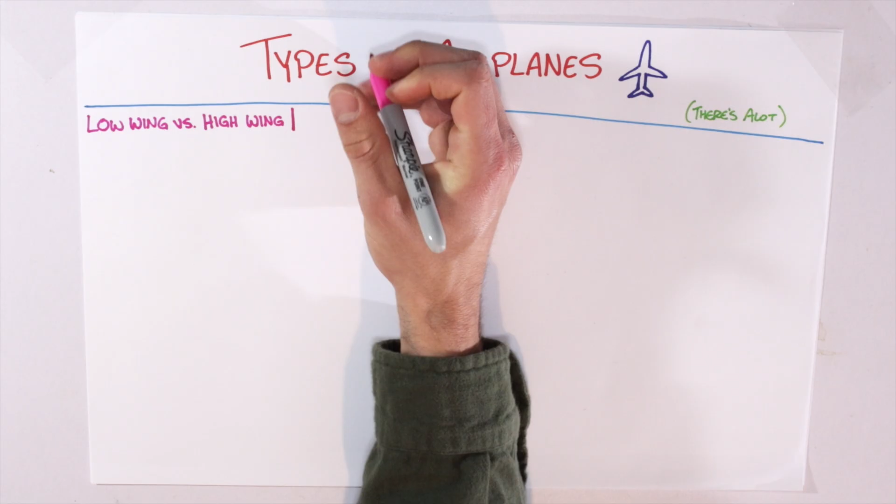These are going to be low-wing planes versus high-wing planes, as well as two different types of landing gear configurations. We'll also discuss a couple of outliers like seaplanes and aircraft with tandem gear. Alright, let's talk about high wing versus low wing.

You show up for your first day of flight school, your trainer walks you outside to the ramp to see the plane you'll be piloting, and you see it sitting there, a nice, shiny Tecnam Sierra, basically a Porsche with wings. Well, just as you get your hopes up, your instructor says not a chance and directs you to the left where you find what you'll actually be flying, which is most likely the much cheaper Cessna 172. This is a high wing aircraft.

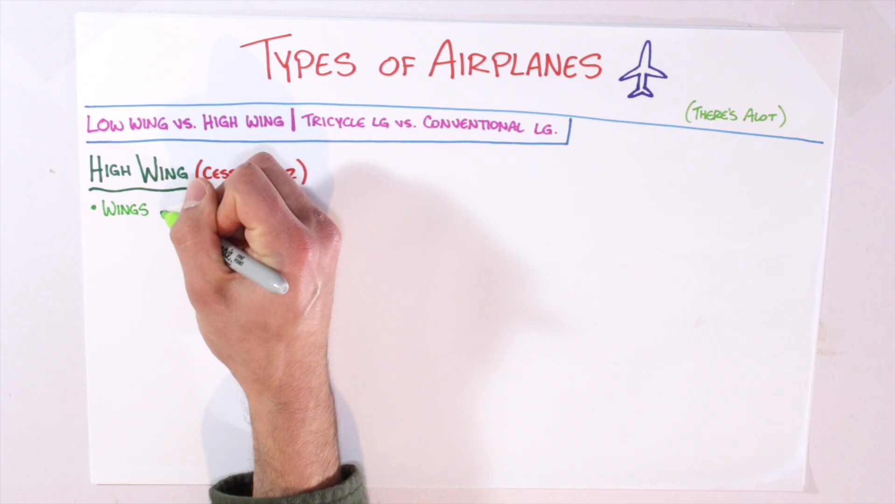The term is pretty self-explanatory, but with these, the wings are higher on the plane, sitting right above the doors. There's some pros to these, but also some cons. As far as the pros, high-wing aircraft are great for beginners because they're very stable and forgiving. Even with an instructor in the cockpit, you're bound to make mistakes here and there. As a student, being in one of these planes will make those mistakes a lot less consequential.

You'll also have safer landings at slower speeds and an easier time with ground clearance on rougher, poorly paved runways. They're also easier to get in and out of. In a high-wing airplane, you're going to have better downward visibility, meaning you can see what's below you. This is handy for spotting landmarks, having a better view of the airport and runways, and most importantly, aircraft that are below you. However, as a student, you're more likely to have aircraft above you than below you.

And this brings us to the cons. High-wing planes make it pretty difficult to see what's above you, so you'll get a pretty good neck workout in trying to spot airplanes at higher altitudes. High wings are also a lot slower because they have slightly more drag. If you're planning a trip to fly a longer distance, you'll probably want to take a low wing, not a high wing. If you take a high wing, you might as well drive instead.

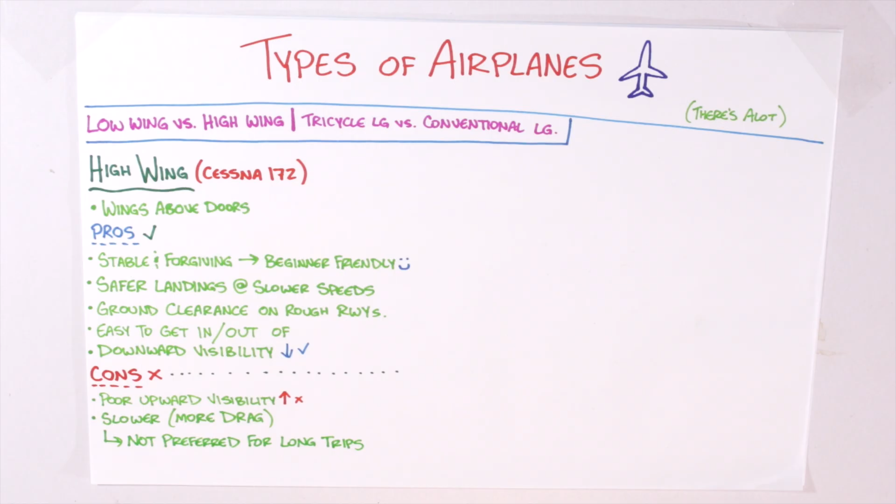Speaking of which, let's talk about low wing planes. That Tecnam Sierra you thought you'd be flying at first is an example of a low wing aircraft. As far as the pros for these, contrary to high-wing airplanes, low-wing airplanes have better visibility for what's above. They have more responsive handling, like you're driving a BMW instead of a minivan, and they also have less drag, making them faster in the air. It's also easier to access engines and fuel tanks.

For the cons, low-wing planes are less stable at slower airspeeds. They're more difficult to get in and out of. The wings are closer to the ground, which can make landings on rougher fields more risky, and obviously there's lower downward visibility.

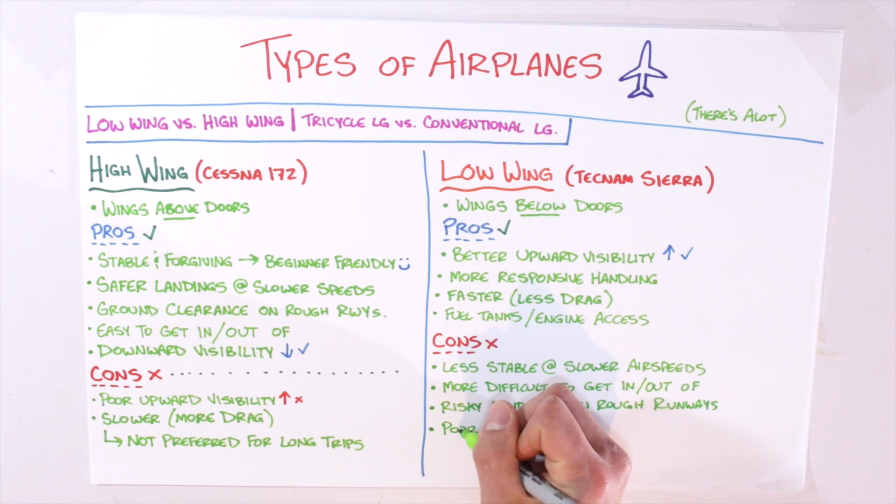Think of it this way. High wing equals calm, stable, and beginner friendly, and low wing equals fast, agile, and performance focused. Low wing planes are a lot cooler, but looking cool is something to worry about when you actually know what you're doing. So when you first start out, stick to high wing. They're a lot safer for beginners.

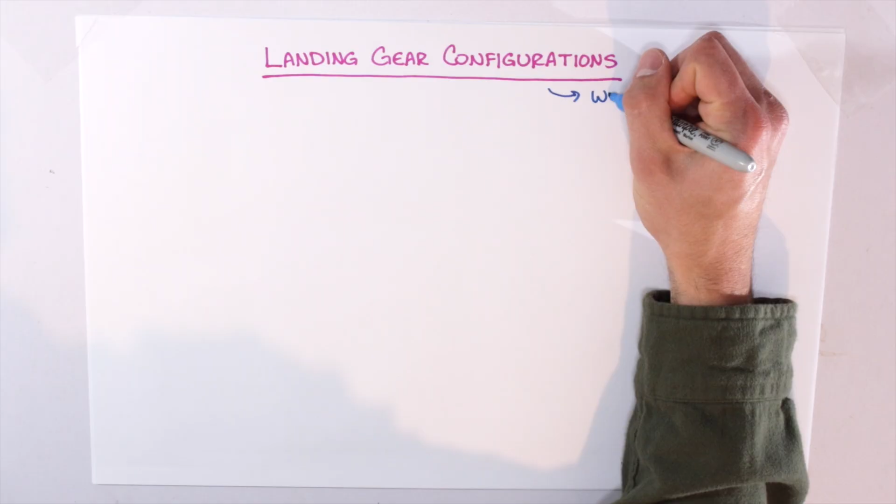Alright, now let's talk about landing gear configurations. These are typically categorized by wheel placement. The main two that you'll be seeing as a student pilot are tricycle or nose landing gear and the conventional or tailwheel landing gear. Visibly, the only thing that distinguishes these two is the placement of the third wheel. On one, it's below the nose, and on the other, it's below the tail, but you've probably put that together by now.

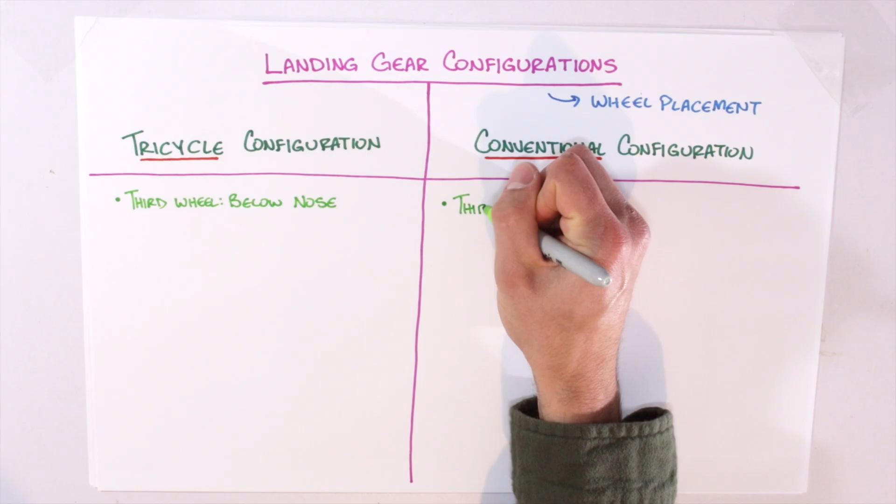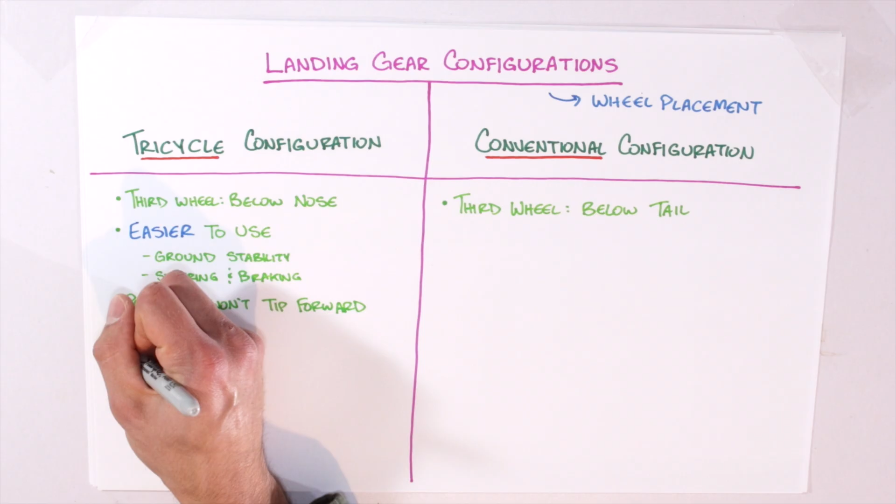In a nutshell, planes with tricycle or nose landing gear are generally seen as being easier to use, with increased ground stability and easier steering and braking. These are also less likely to tip forward since the nose gear acts as somewhat of a kickstand. This configuration is common on most modern airplanes, including airliners, business jets, and training aircraft.

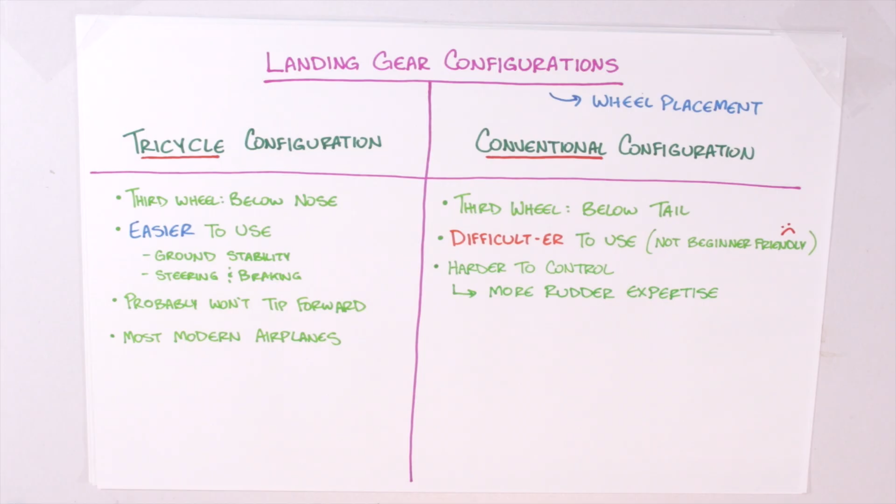Planes with conventional or tailwheel landing gear are more difficult to use, especially for beginners. They're harder to control during takeoff and landing and require much more rudder expertise than tricycle, which is due to two main concepts. One is gyroscopic precession, which we'll discuss in our aerodynamics lessons,

and the other is what's known as a ground loop. Since the center of gravity is aft of, or behind, the main landing gear on a tailwheel airplane, any slight yaw movement creates momentum that wants to spin the tail around, usually during landing or takeoff. So yeah, no pressure when piloting one of these. They're used mainly because they're better for rough, unpaved runways and due to their lighter, simpler design.

Some less common ones include quadricycle landing gear and bicycle or tandem landing gear. These are mainly seen on military aircraft, so their specs probably are not directly useful to you right now, but if you're super interested, just Google it. Quadricycle layouts are mainly seen on ultra-heavy aircraft, which makes sense. The more weight you have, the more support you'll need.

With tandem landing gear, the layout consists of two main wheels aligned along the center of the aircraft with one behind the other, and usually two outriggers on the outsides, which are smaller wheels to increase the plane's ground stability, like training wheels on a bicycle.

One more configuration to consider is the large floats on a seaplane. Now, if you take off and land in one of these on your first day of flight school, your instructor will most likely get his certification revoked. It's solely for operations on water, not land, and the use of the large floats rather than wheels allows the plane to take off and land on the water. Again, you most likely won't see these three anytime soon.